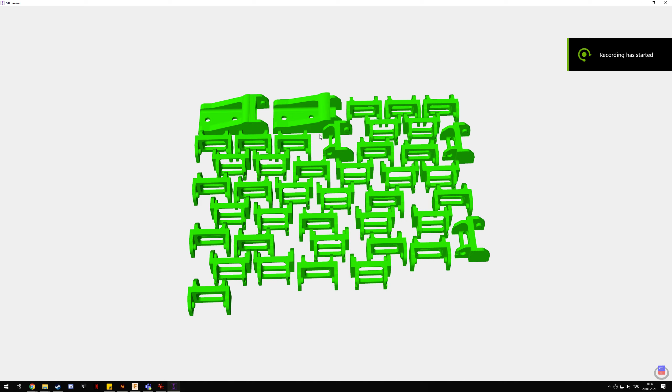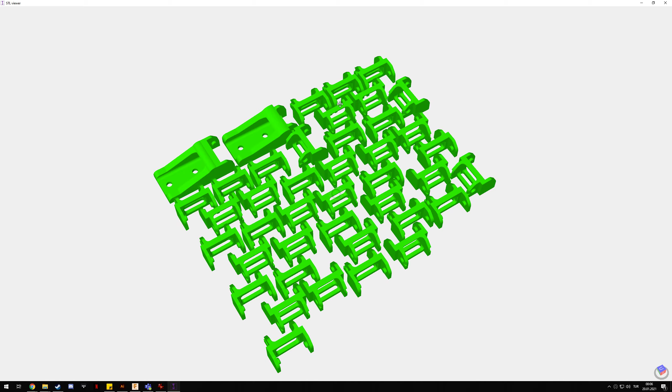Hello everyone, a while ago I made a video showing some of the useful software for people who are interested in 3D printing, but I don't know why, I forgot to mention Plater. This is actually one of the most useful pieces of software that I've used, especially when printing a lot of stuff. So for example, in this case, these are parts for a drag chain for the MPCNC project that I'm working on, and you can see that this is nicely organized on a plate here.

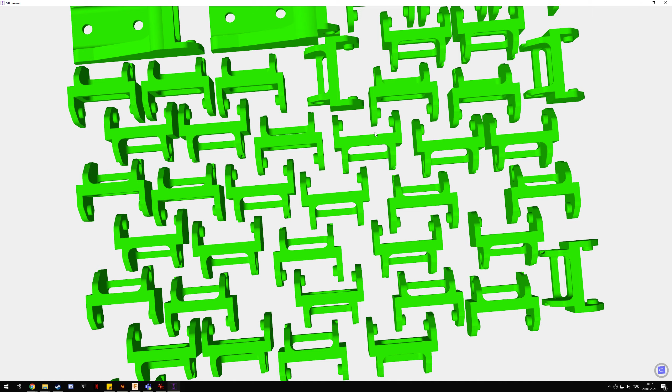So what Plater does is place all of the small STLs you want on a larger plate, so it's just one STL for the entire plate, and it does it in a way that's really efficient in terms of the space it takes. You can see that a lot of the parts that protrude stick inside each other, so it doesn't draw an artificial square around the parts like the platers on the slicers do. Instead, it tries to place the parts in the most efficient way possible.

And with this, for example, if you have a multi-part print, like if you're printing a new 3D printer or a new machine or something, you normally have tons of plates to deal with. Well, this can reduce the amount of plates you have to use.

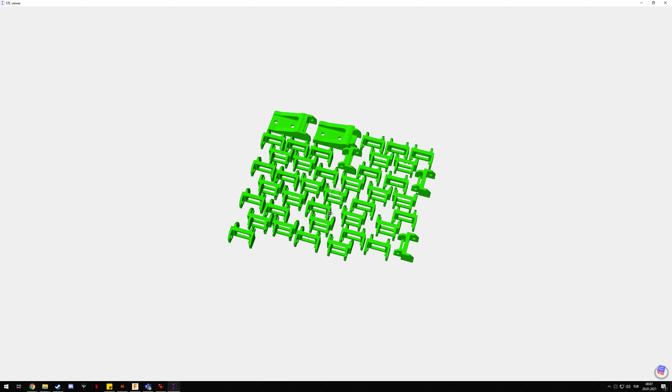You can download Plater on GitHub. I'll link this in the description below, or I'll probably link the releases page actually. So you can download it from here. The source code is also available, so if you want to check that, you can. Assuming you're using Windows, you need to download this one, not the tool one. That doesn't have the GUI or anything like that, so just download this zip file.

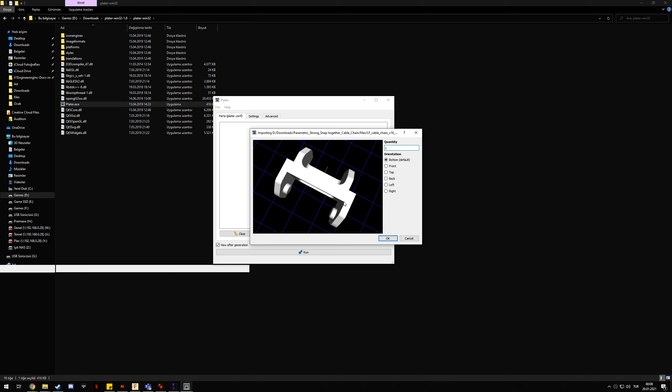And once you extract that, this is what you get. And here you can run Plater. You can see that this is a pretty simple GUI. It's nothing really complicated. You add your parts here. Now there is a bug with this, and I'm going to demonstrate that by adding multiple parts at once. This happens to me, and I've seen this happen to other people as well, but I don't know if this happens to everyone or not, but you'll see. But before that, let's look at how you decide how many to import and what the orientation is.

You can choose the orientation here, so you don't have to make sure the STLs are oriented correctly. You can adjust that here, and you set the quantity here. I'm going to set it to something ridiculous, who cares. And this is the bug. When you try to import multiple files at once, it sometimes crashes like this. So the solution around that is, unfortunately, you have to add files one by one. So you can do that.

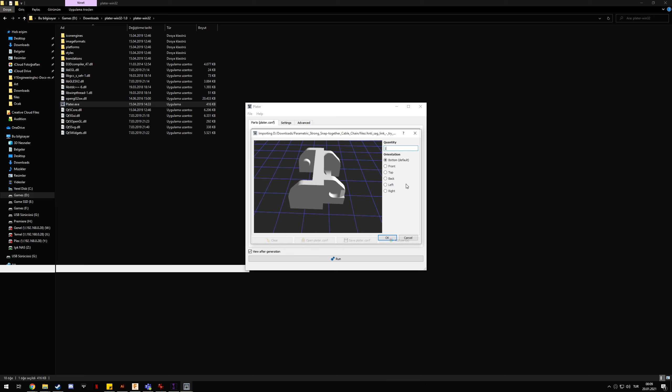So 10 of this, 18 of this, 19 of this. You can see that it's not crashing if you add them one by one. So that's something you have to pay attention to. That's an unfortunate bug, but not much we can do about that. After you add all of your parts, obviously the list is going to be longer. You can set the rest of the settings.

Here you set your plate size. For example, on a 350 by 350 like mine, I recommend setting it slightly smaller than that, so 330 by 330. You can change the output directory here if you wish. If you don't change it, it's going to output to the same directory as your first file. And you can also set a circular plate if you have a Delta printer or something like that. You don't really have to mess with the advanced settings, but if you want to, you can.

Once you have everything set up, you just run this, and it comes up with the most optimal layout with the least amount of plates possible. You can see that the current solution it came up with consists of 3 plates. It's going to give me a preview in a second. So this is the first plate. Again, you can see that it's organized pretty efficiently. Next one, same idea.

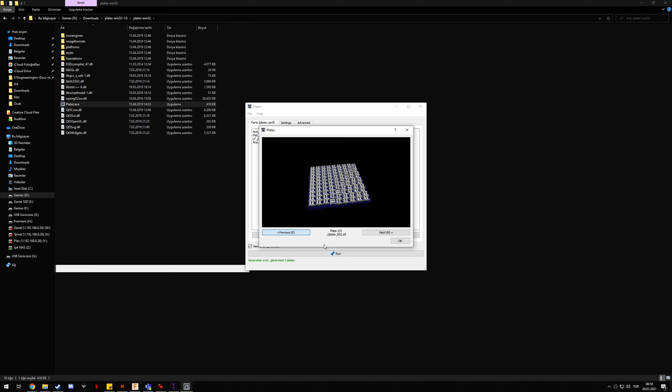And the third plate has a lot of empty space. Well, that's because the previous 2 plates are full and it used the parts it needed to. You don't really need to put anything in there, so that's why it's not maximized, but you can adjust that if you wish. You can go for a smaller plate, or you can add more STLs, etc. But you can see that it came up with a really optimal solution.

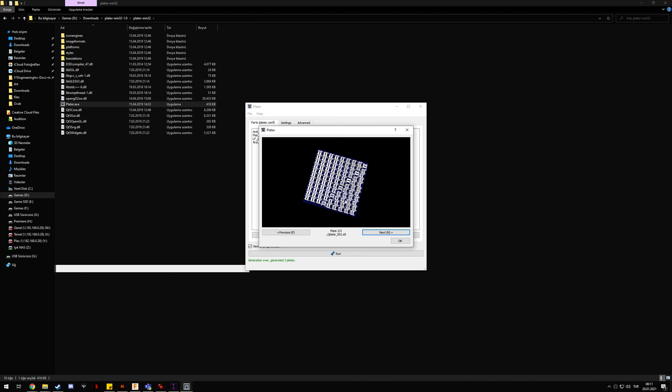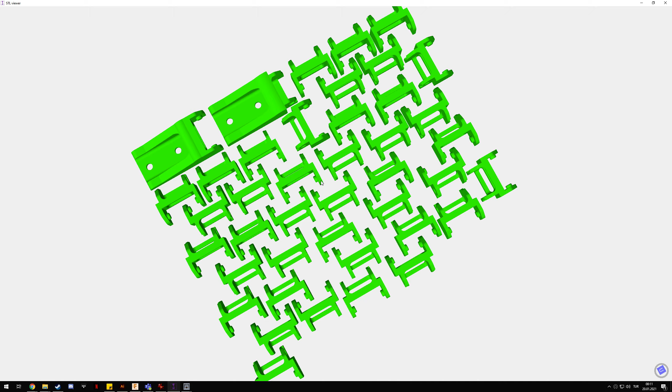Doing this type of thing on a slicer is ridiculously time consuming, because you have to either add one by one or copy and paste. Also, auto spacing on the slicer platers creates an artificial box around the parts, so it doesn't really organize them in this way. It just spaces them out, so you'd end up with a lot more plates than 3. So you can see that this is doing its job very efficiently.

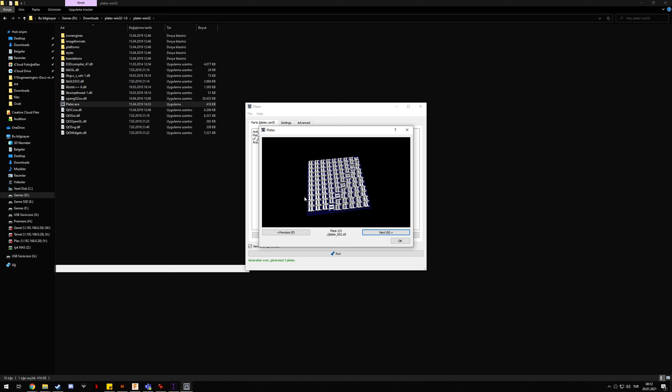Plus it also takes much less time, especially with Cura. If you've imported more than a few STLs, you'd know it lags like crazy, even if you disable the background slicing. And even with something like SuperSlicer or PrusaSlicer, it's still not that quick, and it doesn't really lay them out as efficiently, as I said. So this is a really useful piece of software. I highly recommend it, so I thought I should make a video covering it.

But well, that's it for this video. I'm going to be lazy and just open this picture so I don't have to edit this video.